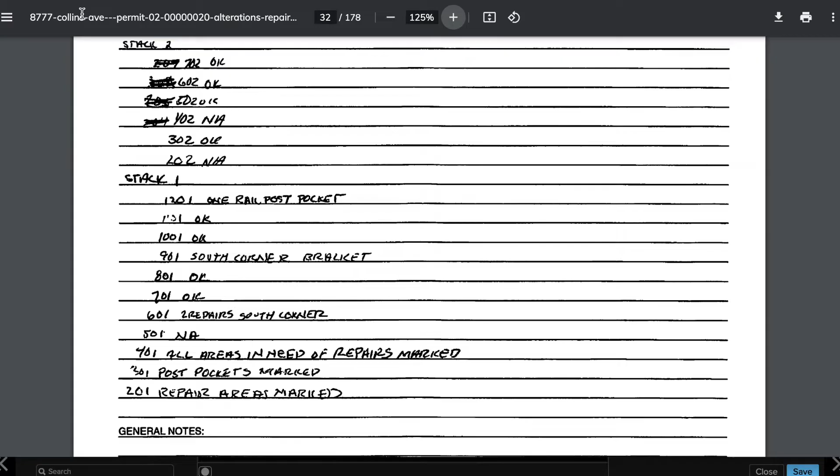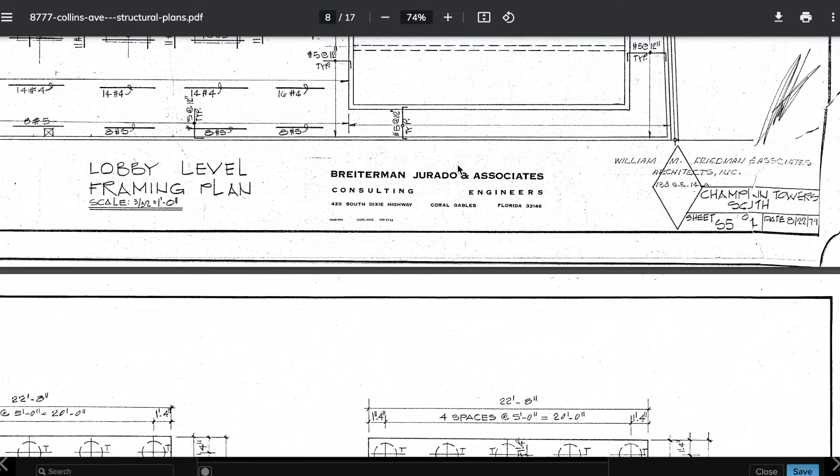8777 Collins Avenue permit, that's what I'm looking at. Now everyone likes to point out over here it says Champlain Tower South. This is 8777 Collins Avenue structural plans. So you can say south and north and all that other stuff - this south right there. I don't get where you guys are getting so bent.

I mean, everybody says that this is a twin building of the other - see right here, north and 1982, south. Everybody says this is a twin building of the other one, and that if something happens to that one, it might happen to this one too, but nothing could be further from the truth.

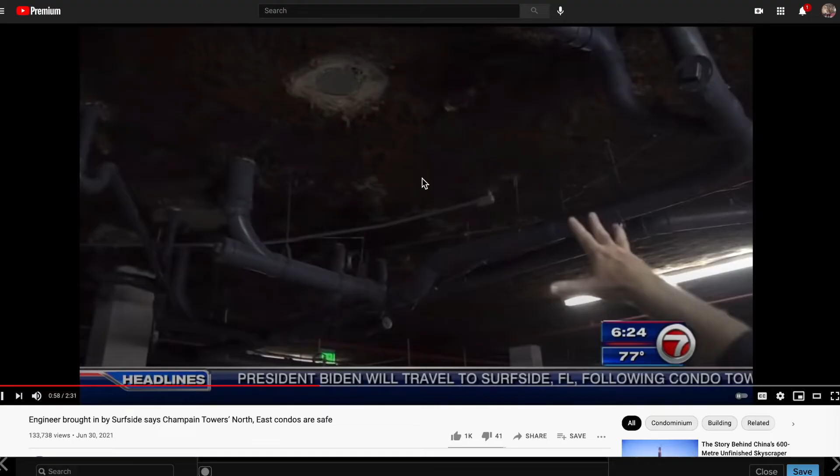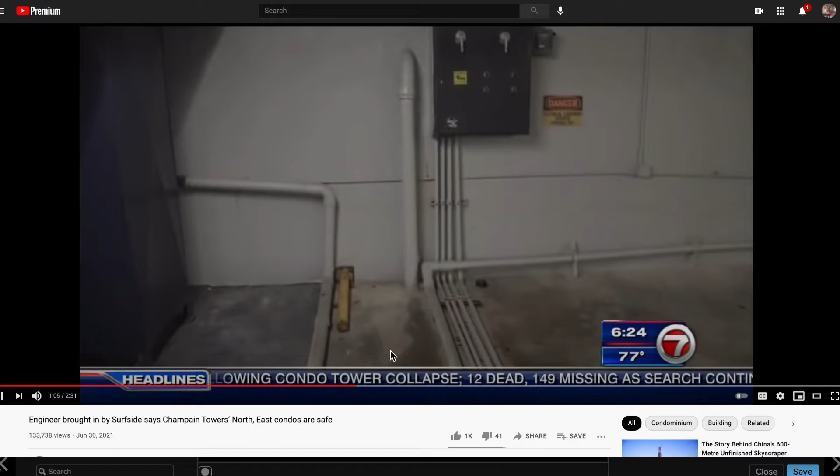In a walk through the North Tower's garage shows no signs of cracking - no signs of cracking, looks like a little bunch of black. No exposed rebar, no water. And the pump designed to pump water from the garage is brand new - water, see right there, that connection there. Now there's a little bit of...

The association's confidence in the North Tower is echoed by an expert hired by the city to help determine why the South Tower collapsed. Structural engineer Allyn Kilsheimer says he took a good look at the North and the newer East Towers, and says there's no need to sound the alarm, based on the exposed and visible conditions of what he saw. So based on visual conditions, this guy says your building's safe.

Well, the visual conditions of the other building looked like it might have been safe too. Based on my experience with buildings and garages, no, I do not think that's necessary.

Right there, that's that little inside unit, right? That's right about here where the wall failed on the other one. But this one's got a little different configuration - that porch setup with this breezeway, if you will. The expert. That's where the staircase, I think, is on the other one. Walk through the South Tower's sister building - this is right on top of each other, whereas the plans on the other one have it kind of staggered.

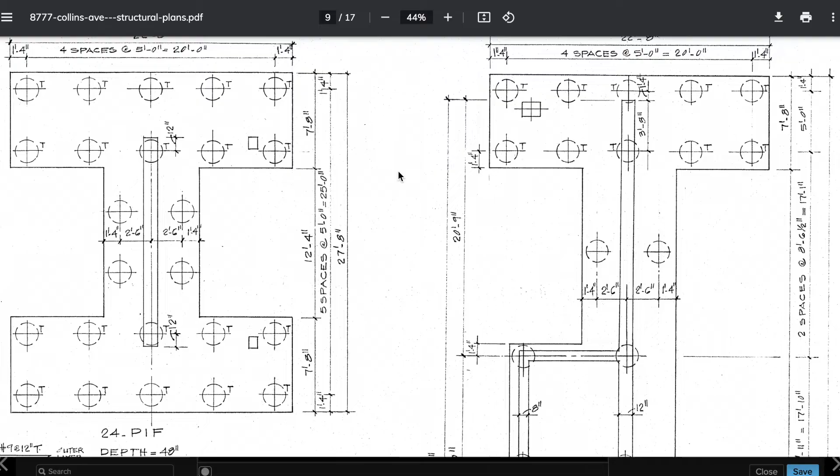And if I get the plans wrong, and you guys want to point that out to me, don't forget to point it out with the PayPal.

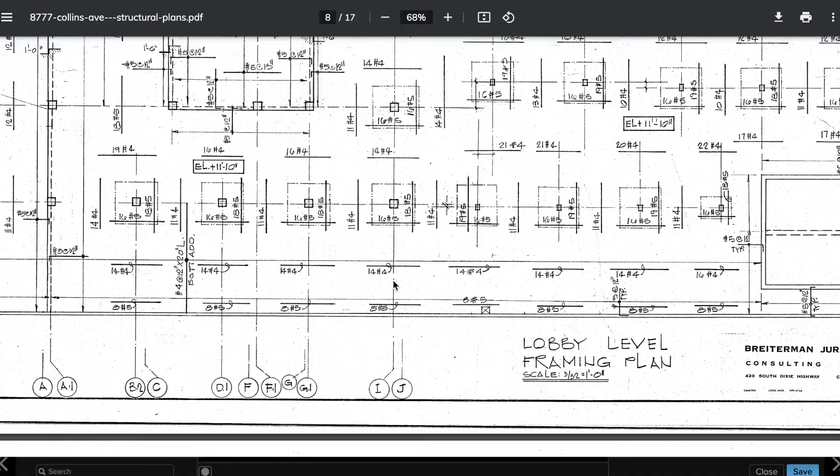But you see the setback right here. Framing plan, lobby level framing plan - it's good enough for me. Let's see if I can trigger some people. There's this south, lobby level framing plan right here. And the, yeah, don't want to get that wrong.

Right, so that's set back to there. Wait a minute, am I doing that one?

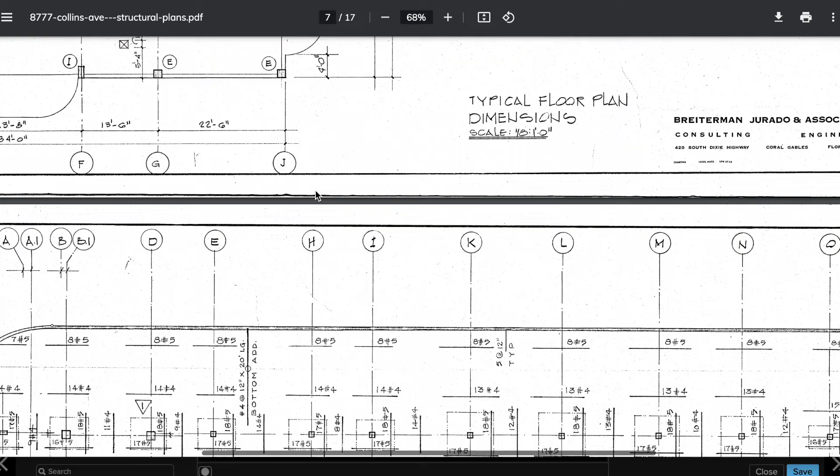Typical floor plan dimensions. So our structure that we're looking at with the collapse video is configured a little bit differently. See how the porches are in line with each other, and those porches are not.

See, those porches do that on the inside, they go straight back, whereas that guy is a different beast. She has this beautiful inside radius going on.

Now someone said, oh, you're pointing at the wrong building. Well, if I'm pointing at the wrong building, then Channel 7 News is pointing at the wrong building too, all right? Chill out.

So, reassurance. I always say to people, if I tell you I won't let my kids in the building, then you have to worry. And he smiles about it. Remember the amygdala? If you're lying, you're going to take it back. If I tell you I won't let my kids in the building, then you have to worry.

And remember, for all my viewers, new and old, the amygdala is something beautiful. I think it's all I want to be known for, actually. It will explain everything that you own, that you fight for. So the amygdala is thought to be just for fight or flight. I state that it's only for fight purposes.

And we fight passively, by me saying, you know, get your own video - that's passive. We take any attack as an attack, and the amygdala is petty, what I call a petty bitch. It will want to fight back somehow, through passive aggressiveness, through blocking people, etc.

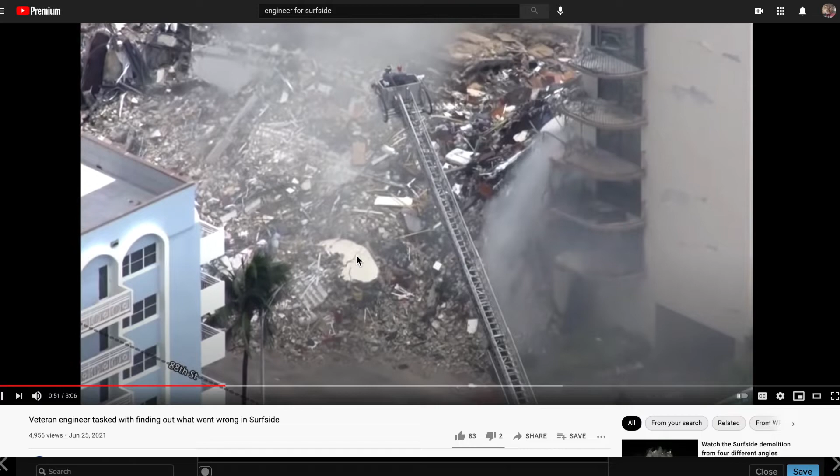On the spans, he's been a structural engineer for 54 years. He actually wrote the 40-year building recertification process for Miami-Dade County. Oh, that's the guy. He's investigated the Miami-Dade College garage collapse, the FIU bridge collapse, and many others around the U.S.

But he says this one is different, and he's watched this video 100 times. That was an eye-opener. The only time I've ever seen something that dramatic, that quick, was when we were imploding, demolishing buildings on purpose.

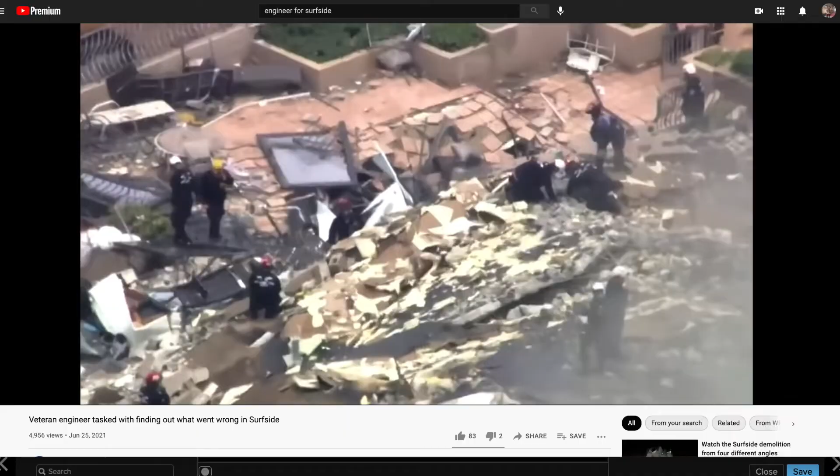Once the recovery process is done, a team of engineers will move in. They're going to have to pull pieces of the building off one at a time, and we put them in a separate yard, and so we kind of almost reconstruct the building and identify every piece, where it was, where it should have been. How did that fail? Was it a collapse or something else?

But even before that work starts, the video does tell a story. Sequence of collapsing, mechanism of collapsing, leads me right to that center area. This, to me, seemed like it.

Well, this guy's a fucking genius. It was really from underneath the building.

This collapse has many wondering about high-rise safety. I think our buildings are fine, and we have no reason to fear if you're living in a high-rise.

There you go, another mouthpiece. You should be worried because of this. Something here is very unique and something I can't answer right now, and that's what's bothering me.

The Champlain Tower South was demolished. They said, look at this, this is what you said. They said July 6th. This is what one of the viewers who watched this channel said.

On Sunday, engineering experts are still studying images taken right after the initial collapse, and what they've discovered is concerning. Local 10 News investigator Jeff Weinstein continues our live team coverage. Jeff.

Nicole, experts are comparing the original building plans to pictures taken after the collapse, and the amount of steel they thought they would see, they aren't.

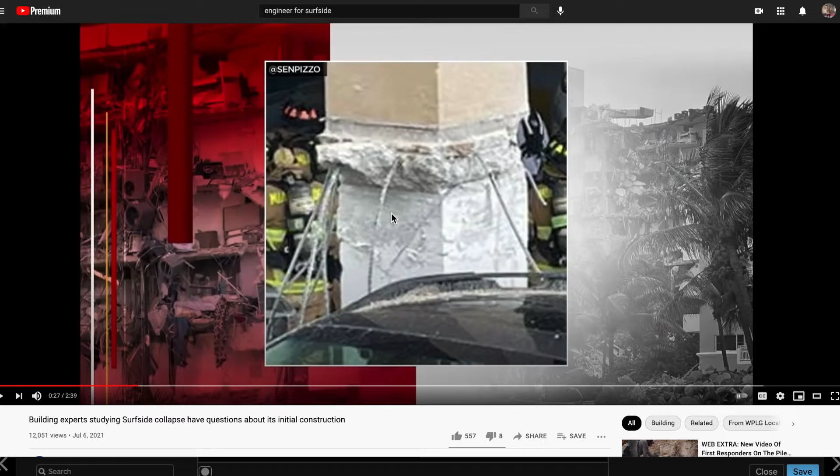What else would he have here? Let's go. And what's left standing is telling seasoned engineers a story.

Yeah, see the two pieces sticking out, the pull-out, we talked about that. But that shape I talked about in one of the videos, and I showed you punch shear, how it is. And we see how the cars stayed in place and the collapse was just direct.

These three columns remained intact after the collapse, and they are raising eyebrows. There seemed to be less reinforcing steel than what the drawings showed.

Not by much, not by much. That drawing doesn't show much. It's 1976 code, it looks like it's pretty close to having the steel. I know I said that it's not enough, I said, but it looks pretty close. I can't quite tell, but it looks pretty close to what the drawings have.

Usually, the shop drawings would beef it up. The architect's drawing is one, but that was the structural drawings there. Either less.

That is the structural drawings here.

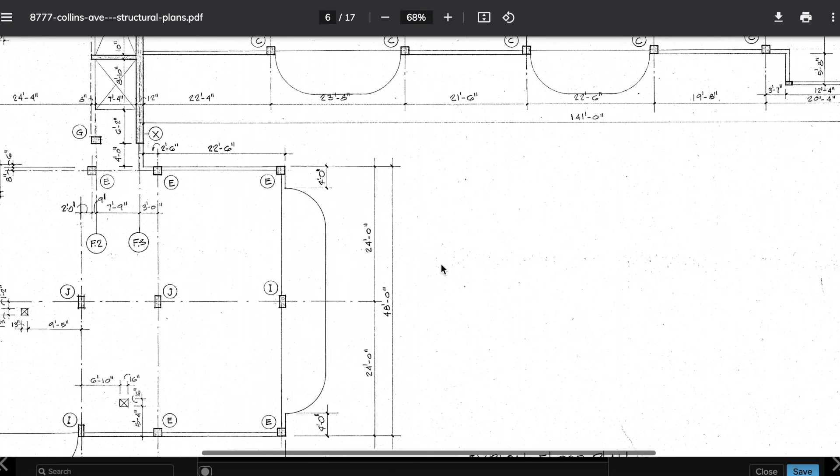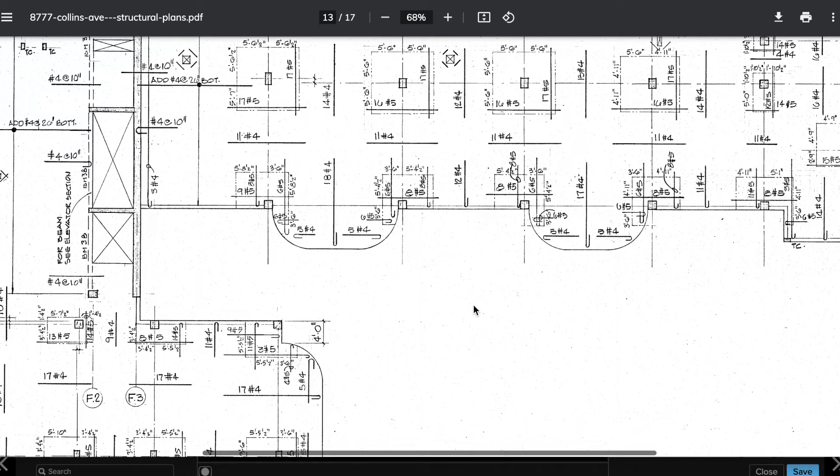Where the hell is it? Let's see, yep, rebar, reinforcement right there. Where are my columns? Where are my beautiful columns?

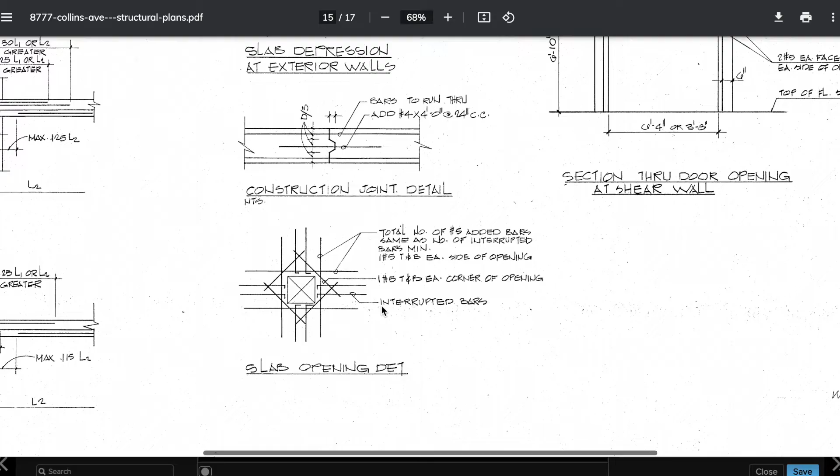Getting close, the one guy was close, my man. So look guys, I think I pointed out punch shear many times. This clearly says slab opening detail for the chute or something like that. My brain, all I wanted to see was punch shear protection, and I called this in numerous videos punch shear protection. I'm off by 10 miles on that one.

Let's edit that. I see two pieces of steel, a couple pieces sticking out there. Maybe here, maybe that one popped off. I see one or two pieces there, so I don't know what they're talking about.

I'm just saying it's not enough punch shear protection. They're saying it's not matching the plans. I'm like, that looks pretty damn close to matching the plans. The other steel's on the ground that came but bypassed it. So I sort of debunked that little columns remain intact after the collapse, and they are raising eyebrows.

There seemed to be less reinforcing steel than what the drawings showed. He says he sees less steel than what the drawing shows, either less or improperly placed or both. Shaker, this steel is not there though. This steel is missing for sure. I did a video on that steel.

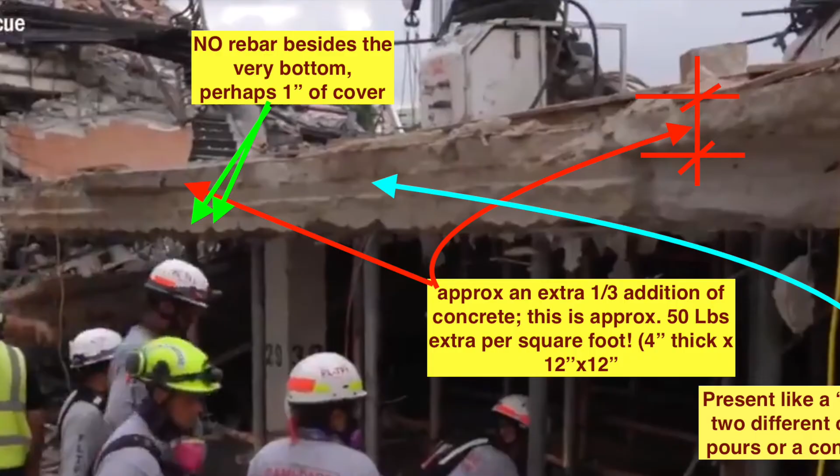Steel on this whole construction joint, so that was missing for sure. And the steel that they should have would be interfaced with the block wall into the floors.

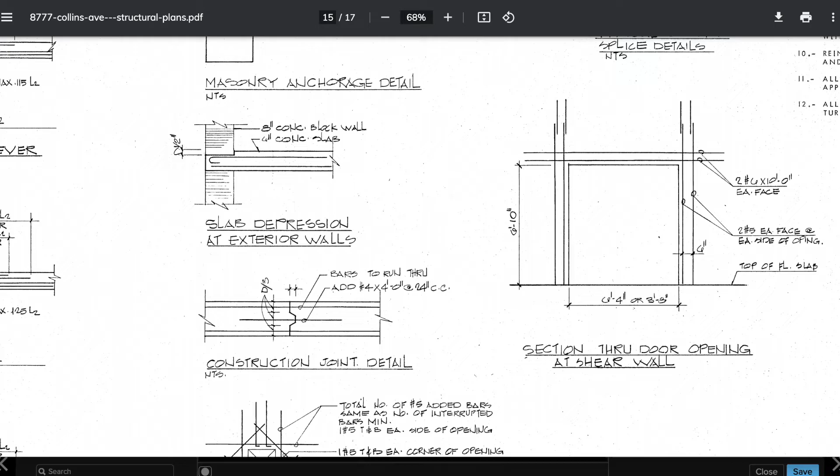All right, so back to this one. Let's finish this up a little bit. Now it's possible the two others were just outside the footprint of the column, so it disappeared with the failure, but they should have been right over the column. This looks like it's stripped out. They could have been in that head, and now they're gone down here.

So there's concerns about the pool area as well. And remember, witnesses claimed the pool deck and garage. So this is the punch here. So now there's probably cars under here holding this up. I would kind of theorize, holding this up at this elevation, and then right here is where their driving area is. So there are no cars.

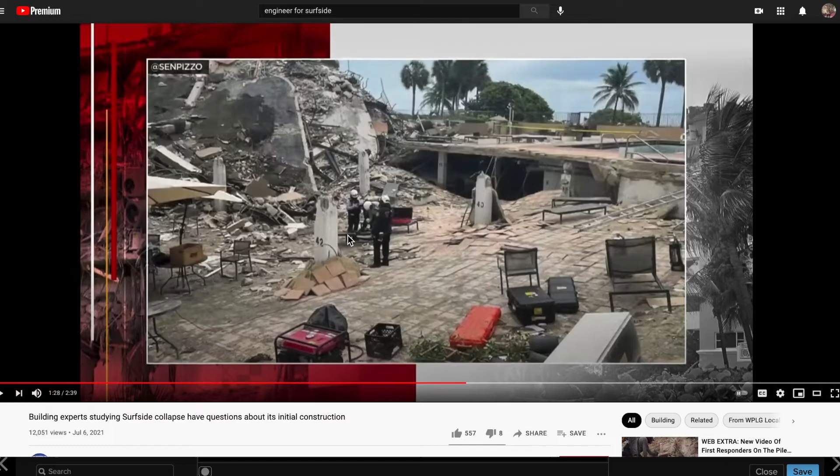Some of the pictures show a clean break in the slab around the swimming pool. Right, but the drawings show that there should be a significant amount of reinforcing steel through that joint. This steel is not there though, this steel is missing for sure. I did a video on that steel.

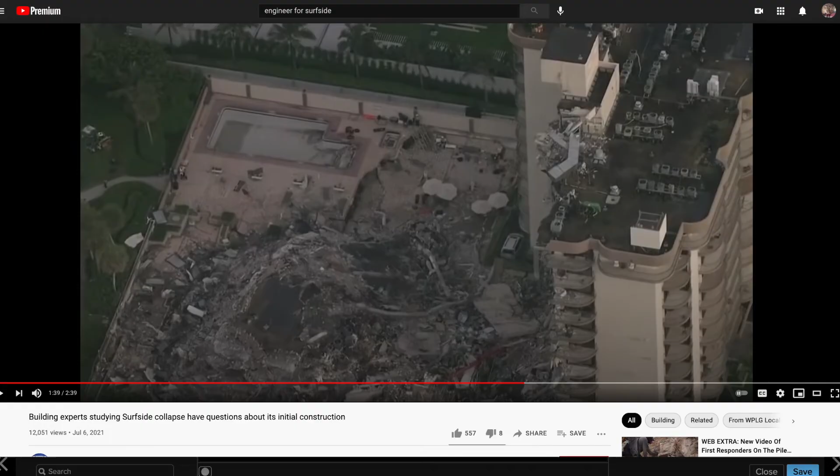Right, okay, so we're on the same page on that, we're 100% on the same page on that. I talked about this joint, there was none there, and I don't see that in the pictures after the collapse.

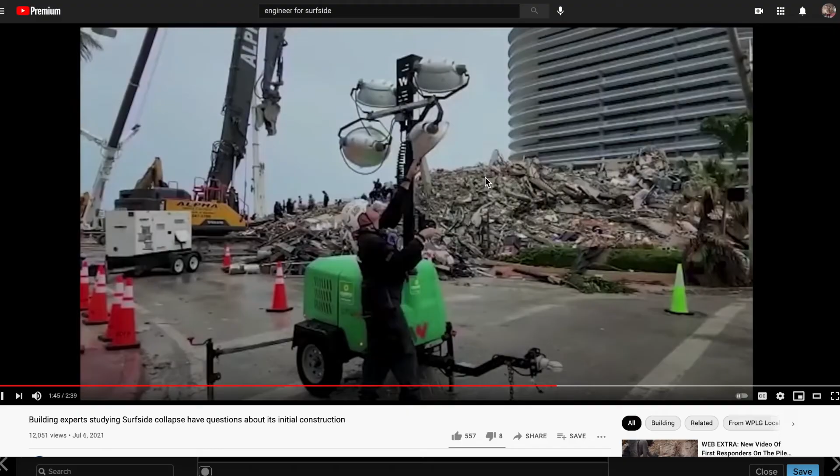The man hired by the town of Surfside to investigate the collapse says more analysis needs to be done. It looks like two pieces right there, see that? There's two pieces from the column.

All concrete is made to crack. All right, so this is bullshit, you're going to see cracks in all concrete. So the issue is, what does it mean?

Oh hell, he's wearing a Surfside shirt now. So he's just saying, fuck it, don't worry about the cracks. The issue is, what does it mean?

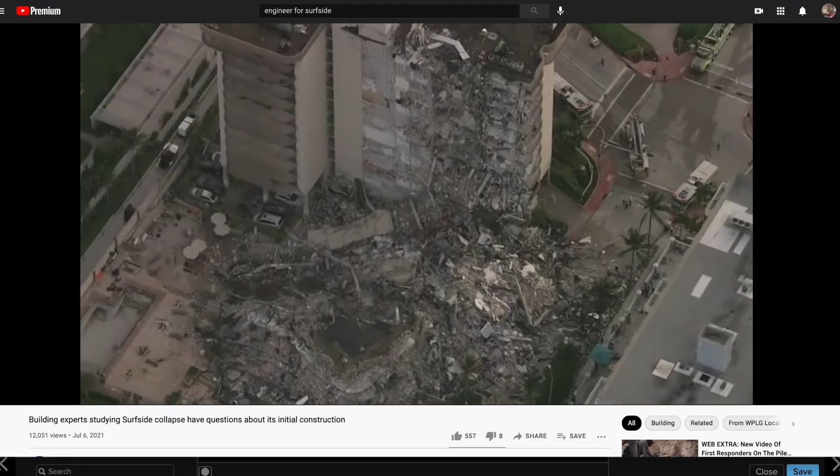That's the bottom line. The only way I can see this having happened is that there was some significant flaw in how it was built. I can't think of any other failure that really surprised me more than this. Some significant flaw. I say there's no significant flaw in this building.

It lasted 40 years, so no significant flaw, 1976 code, but the repairs and adding to that deck and tying into the columns, I believe, were a bad move.

Totally legal in 1976, right, obviously. So you can't say it's a flaw if it was legal then. It's current day, it's obsolete, but you know, current day you tie into the damn columns too. But here we go.

The concrete, the steel, the soil underground will all be tested as part of the investigation. And when this building was built, it was made to crack.

So you're going to see cracks in all concrete. Concrete's made to crack. Where does he buy his concrete from? Concrete is made to crack, so you're going to see cracks in all concrete.

It may be reinforced, where once the crack happens, the steel engages and now it's in tension, so it can still take the load with the crack present. Observing that the crack does not widen on the bottom side - if it does, you're getting slip of the rebar out of your concrete. Your pull-out is losing.

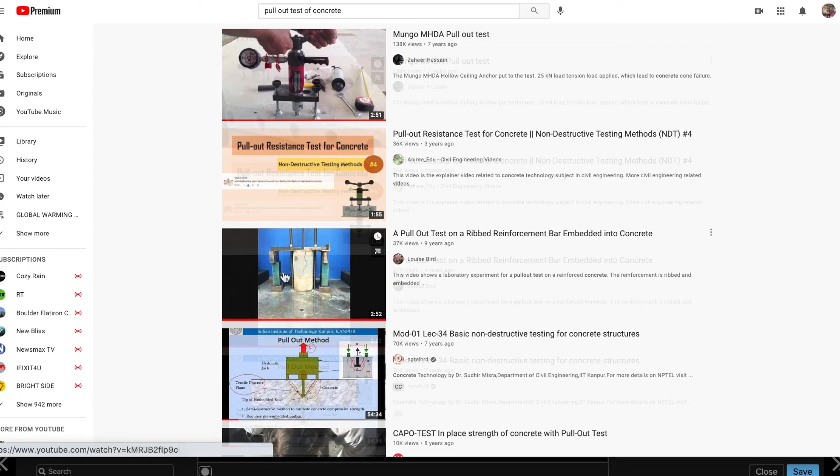So, pull-out test of concrete. Let's try that, let's see the way that came up. Here we go, let's use the 2:52. This is good - a pull-out test of ribbed reinforcement bar embedded into concrete. Let's fast forward to almost full depth, both of them.

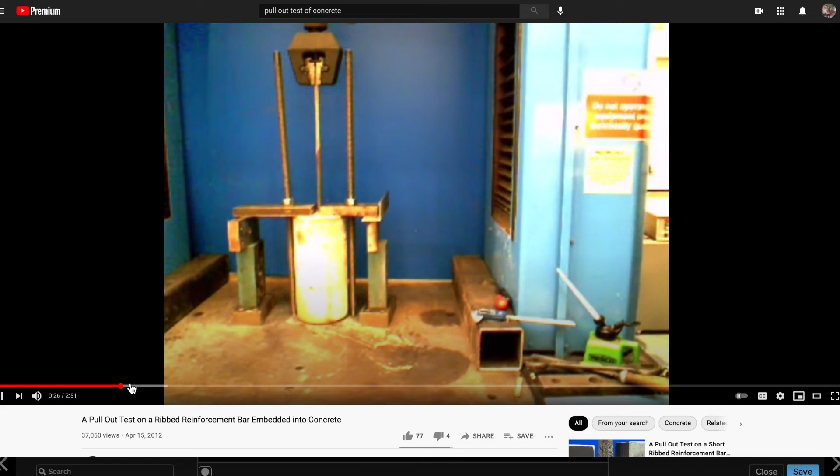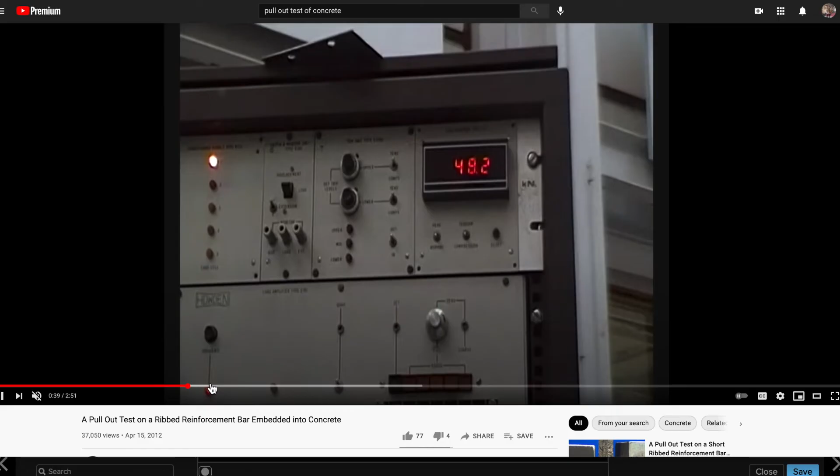Let's fast forward - that's for the reinforcement, and there's the device going to pull it out. It's trapped inside, gradually - let me stop that. It's trapped inside the clamps so it can't go up. So there are actually two forces acting on it: one that's pulling out, and the other is the compressive force pushing down.

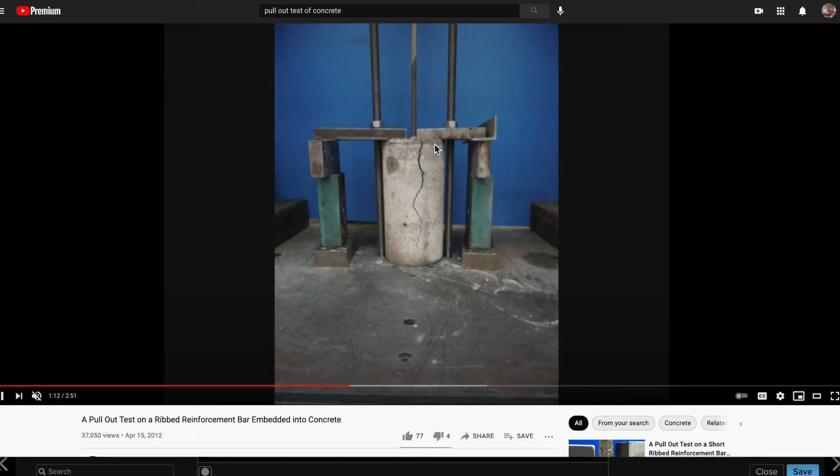So the pull-out comes, it's going to fracture it, but then that will give you a value of failure. So right there's a failure, and say it took 6,000 psi. Well, with that spacing you can then extrapolate how you can keep going. There's the breakout - at that point it's pretty much down. It drops.

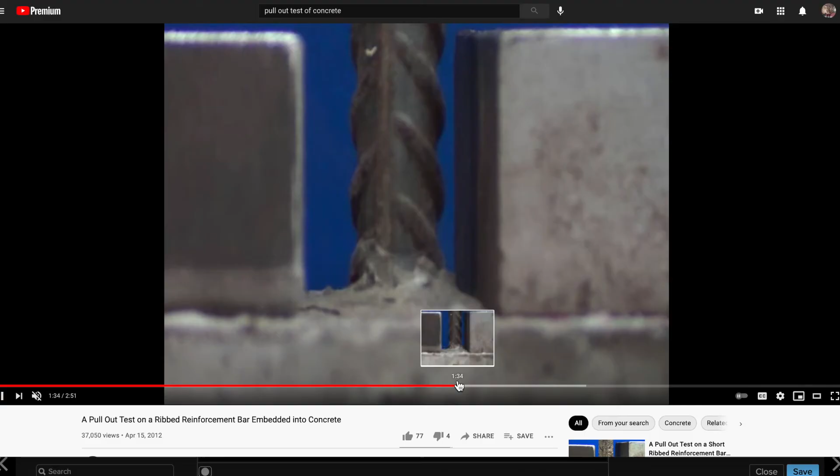There we go, watch it. It drops in value - it can come out at a lower psi. You see the fracture there. So, rebar failure in tension.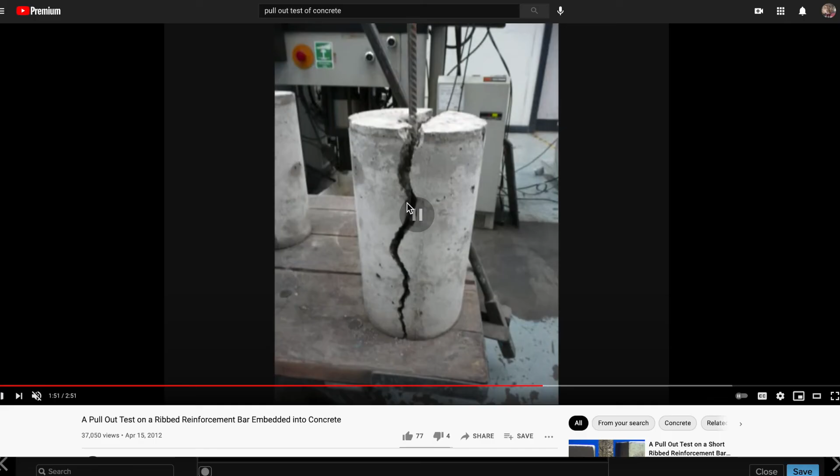Look at this one - this is a huge test for figuring out. Once you figure this out, it's a useful value, because now you know what size bar and the depth you put it in. This is just a wedge, and this is a ram that pulls it out, and it converts PSI, size of the piston, and everything else to the value - tensile strength of the rebar failed, as opposed to the pull-out.

Slow motion on it, I guess. Oh no, there's the burst - there's the cone, so that's the burst now. That's the failure there, it's epoxy. Whoa, what's going on here? Because that looks like - wait a minute, I can't see it. Bend down, watch it again.

Looks like he's doing multiple tests on a sample of concrete, and we'll see the values of it. Can add them up and see what goes. And you can do an overhang with this - you can say, okay, now we can do an overhang. All right, the value is there - they know the penetration of that concrete.

Just again, we just went over that data there. I don't know what you can do with it, but you add it up and you understand that this is a major flaw.

That if they epoxied here, then that's where we get started. But that is going parallel with the end of the deck, not with the pool. Parallel - so here's the pool, this will be what I consider the parallel side. Here's the south side of the structure, north to south, with no reinforcement.

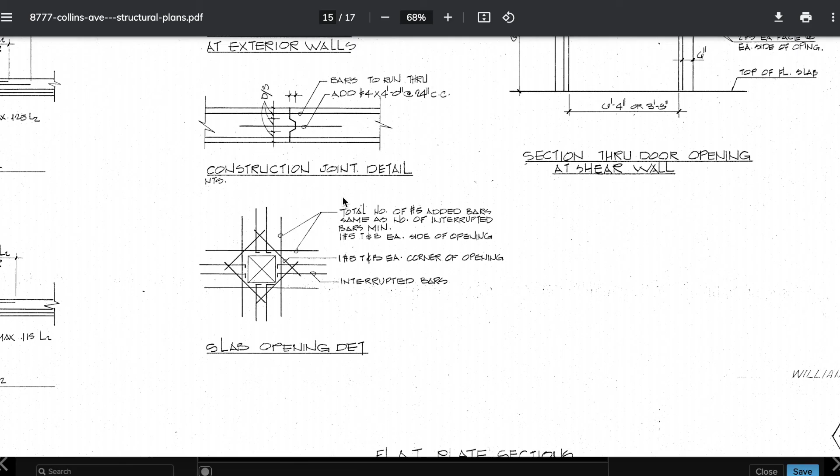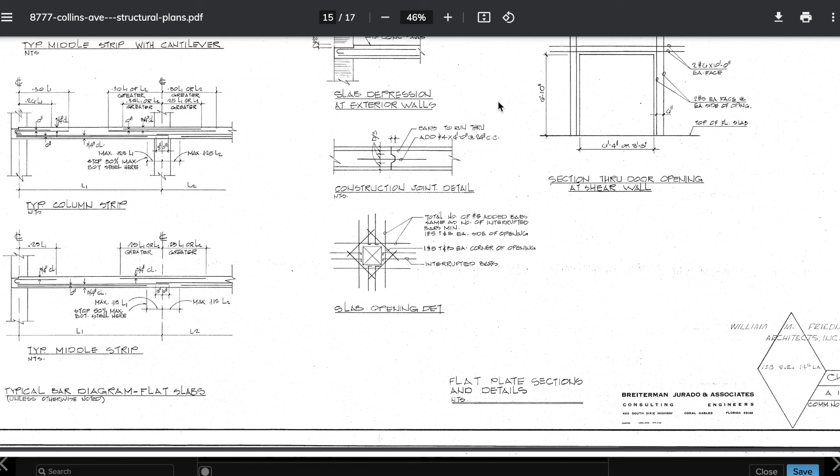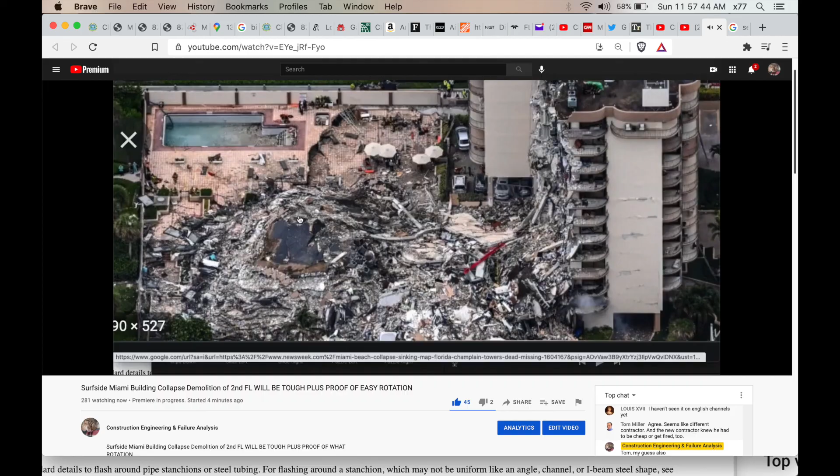You see the cars are pretty intact there. Keep in mind the deck didn't really fall down in that parking garage area right there, as you see in the lower left here, below the 527 or above the 527. So you'd have been safe had you been in that car apparently. And that would be Q, the closest column to that - follow that Q straight down.

So that's interesting, that the safest place is where the deck held out down to there, which also means we don't have all this quicksand you guys are talking about causing all this falling down. That's more evidence that there's no liquefaction that took place, no sinkholes at that location now. So, debunking the sinkholes.